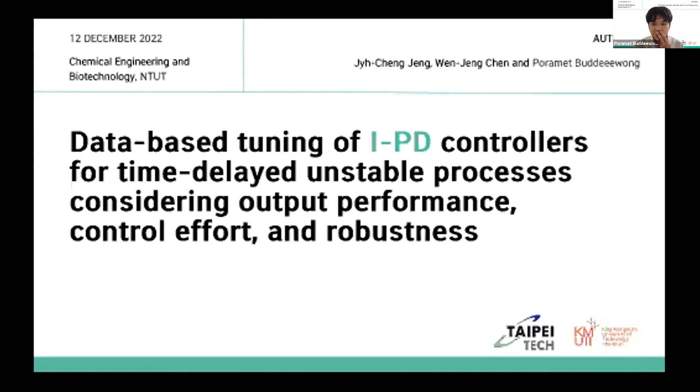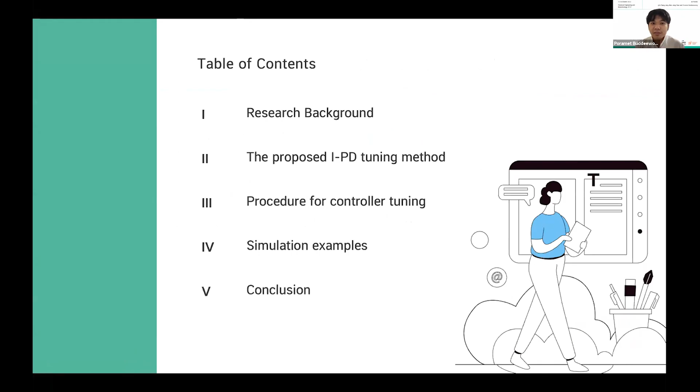My presentation is divided into 5 parts: research background, the proposed IPD tuning method, procedure for controller tuning, simulation example, and conclusion. First, I would like to give you some background information. Let's start with the PID controller. As you know, the PID controller is widely used in the chemical process industry because it has a simple structure and performs satisfactorily in many control applications.

However, the PID controller performs badly for controlling time delay unstable processes. The major weaknesses of the basic PID controller are the effects of the proportional kick and derivative kick. In order to minimize this effect, modified forms of the control structure have been proposed, such as the PIDP and PIPD controllers. But the major weakness of the PIDP and PIPD structures is they have 4 parameters to be adjusted, so it can be difficult to decide.

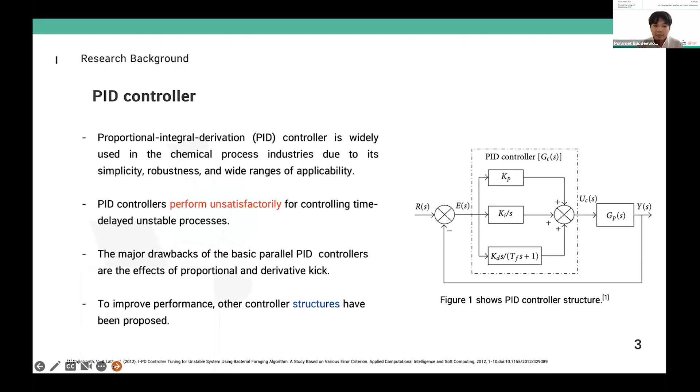From the problem that I mentioned before, the IPD controller has been proposed. The IPD controller is one of the modified versions of the PID controller. It was proposed for eliminating the proportional and derivative kick. The right-hand side of this slide shows the IPD controller structure, and the bottom of this slide shows the control output equations of the PID and IPD controllers.

As you can see from the equation, all terms of the PID controller respond to the error signal, but the IPD controller has only the I term responding to the error signal, and the PD terms work on the process output. After we know what the IPD controller is, next I will talk about the proposed IPD tuning method.

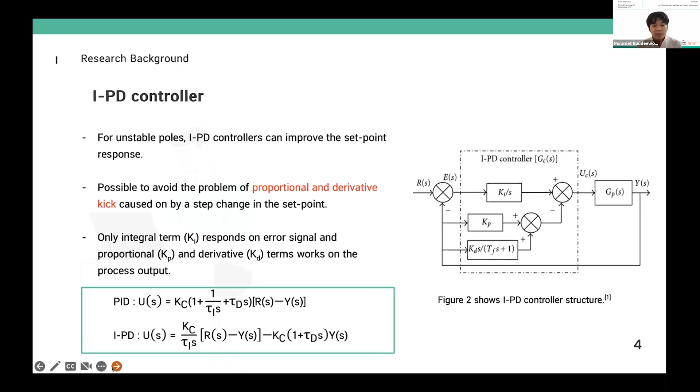In this work, the virtual reference feedback tuning framework is used to tune the controller. The main concept of virtual reference feedback tuning is finding the controller parameters that minimize the difference between the collected data and calculated data. This method requires process data collected from an experiment under closed loop operation. For the IPD controller, the virtual control output is calculated using this equation, replacing the set point R with the process output Y multiplied by the inverse reference model, and rearranging this equation.

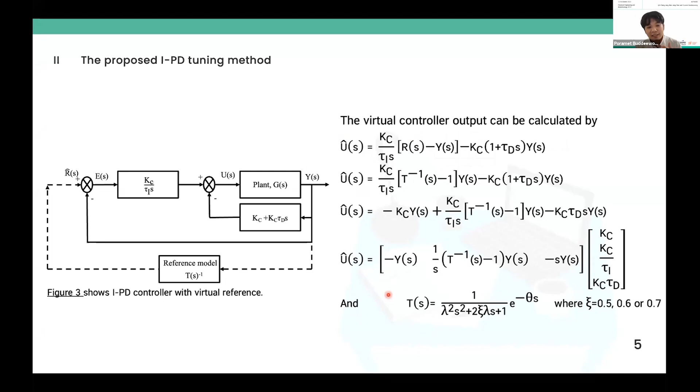For the reference model, there are two unknown parameters, theta and lambda. Theta has been defined, and lambda is found as the lambda which can achieve the target MS. After getting the reference model, we find the controller parameters that minimize the difference between the collected controller output and the virtual controller output by equation 1, and equation 1 can be solved by the least squares method as shown at the bottom of this slide.

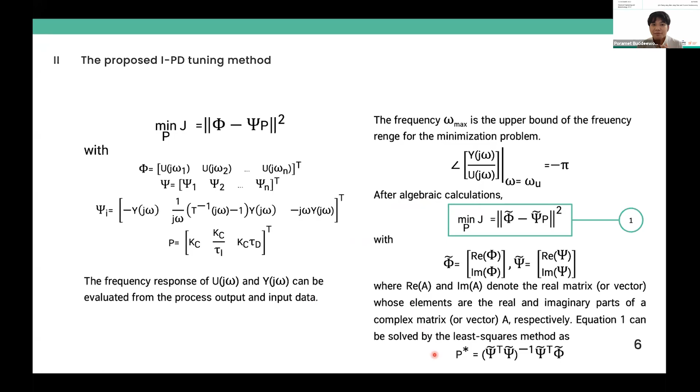After getting the set of controller parameters Kc, tau I, tau d, we find the optimal control parameters by changing theta in the reference model. The objective function of this work is a summation of output performance and control effort, using ISTE to estimate the output performance and ISCR for control effort. Moreover, our objective function has eta as the trade-off parameter between output performance and controller effort.

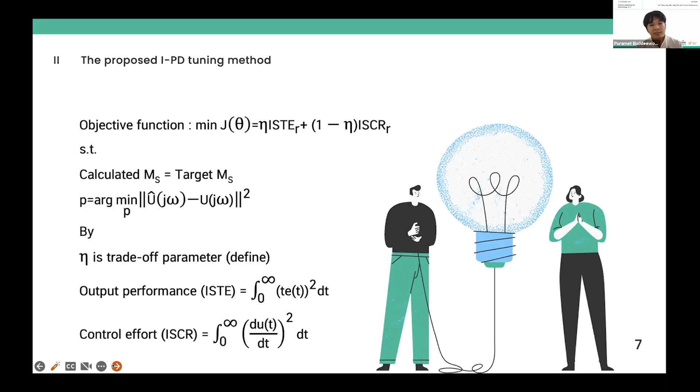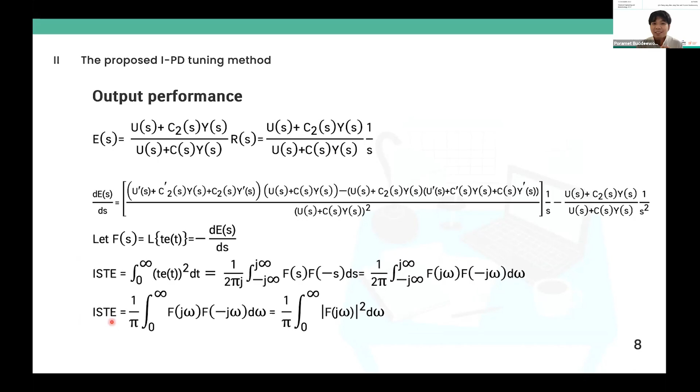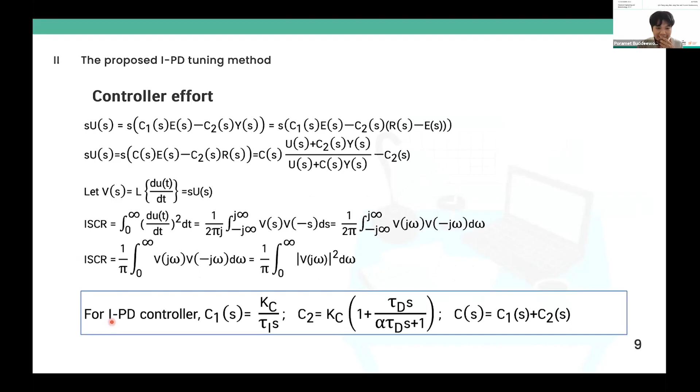I divide the procedure for IPD tuning into 4 steps. Step 1, collect the process data, input data and output data, from a closed loop set point test. Step 2, set the searching range of theta and decide the level of system robustness in terms of MS. Step 3, solve this minimization problem within the range of theta that we define in step 2. The algorithm involves 2 nested iterative loops, the inner loop and outer loop for the iteration of lambda and theta respectively.

For each chosen theta, the parameter lambda is found as the lambda which can achieve the target MS that we define in step 2. This procedure is repeated for other values of theta until we get the minimum objective function. Step 4, use the optimum theta from step 3 to obtain the proposed tuning parameters of the IPD controller. Next, I will talk about a simulation example.

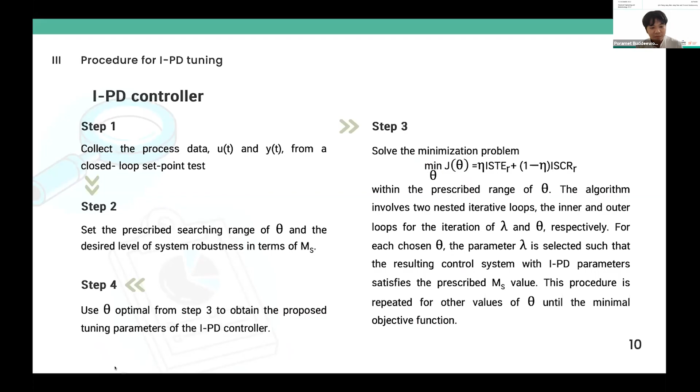For the simulation example, in this work, we compare the result with the model-based tuning design method. And because our time is limited, I will show only two examples. In the first example, consider the unstable second order plus dead time process in this slide. I tune the controller by following the tuning procedure in the previous part.

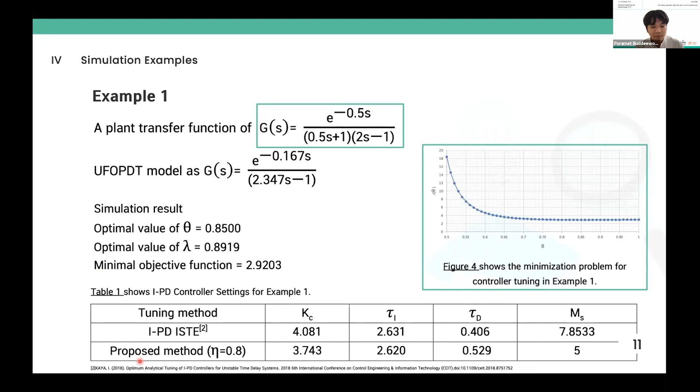One of the advantages of the proposed method is that it allows the user to manage the trade-off between the output performance and required control effort under the specific robustness level. The trade-off parameter eta is used to explain the control performance priority.

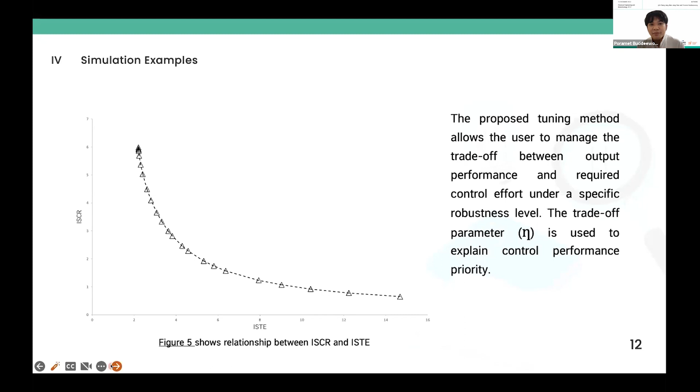Okay, this slide shows the closed loop response to a unit step input change and disturbance injected into the system at 50 seconds. As you can see from the result in table 2 and figure 6, the proposed method achieved a better performance and control effort than the model-based design method, with respect to both set point tracking and disturbance rejection.

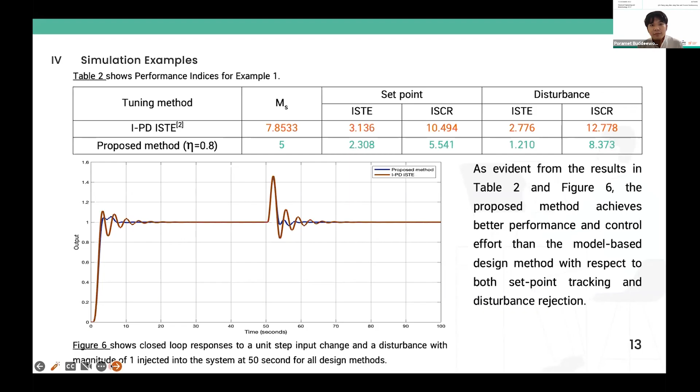In example 2, consider the third order time delay unstable process. The model-based method requires remodeling to the unstable first order plus dead time before tuning. And for the data-based method, I do the same steps and get the result shown in this slide. The bottom of this slide shows the IPD controller setting for example 2.

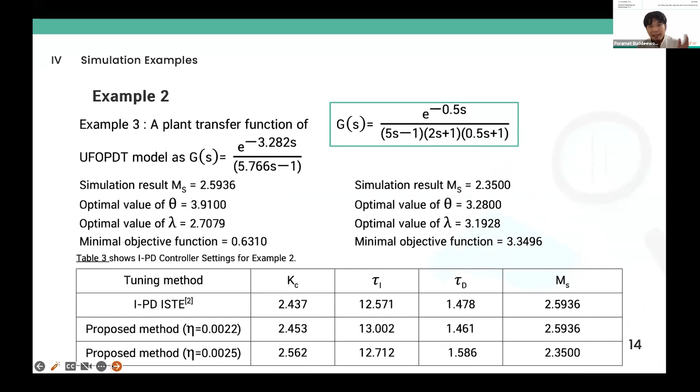And this slide shows the closed loop response to unit step input change and disturbance injected to the system at 60 seconds. The data-based method performs better than the model-based design method with respect to both set point tracking and disturbance rejection. The data-based method gives a smaller overshoot than the model-based method and can reduce the aggression in the control signal. And in this case, you can reduce the MS value to get better performance.

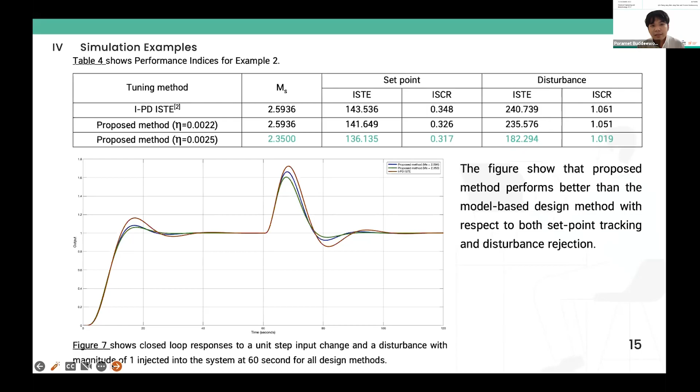For conclusion, we have developed the data-based method for IPD controller. Our method obtains the IPD setting directly using process data collected from a single experiment under closed loop operation. This method contrasts with the model-based IPD tuning method that requires an accurate process model. Then the proposed design procedure is simple and easy to implement.

Moreover, the proposed design takes robustness into the design parameter to meet the specification of the MS. And the effectiveness of the proposed method is apparent from the satisfactory control performance with respect to both set point tracking and disturbance rejection as shown in the simulation example. Then the proposed tuning method is an effective alternative to existing IPD controller design methods.

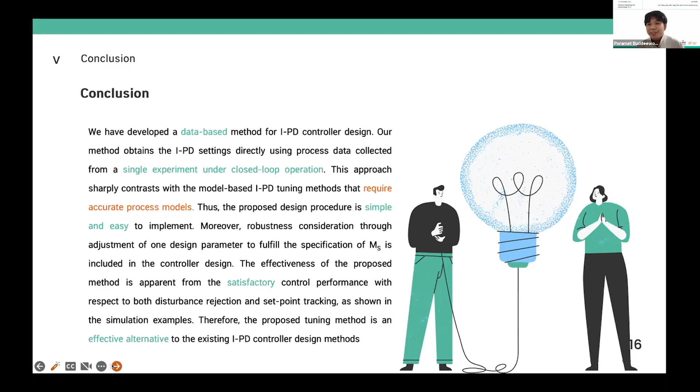Hello, yeah. So my question is, when you say you collect the data from closed loop operation, is that closed loop using suboptimal tuning? So it is not the tuned controller which we use, right? Because when you collect the data from a closed loop operation, what do you mean, under which controller is it working? So that is first. I have one follow-up question too.

So when you compare against model-based design, it can always depend upon the accuracy of the model. So you might also plot how your model predicts the data, because if I can improve the accuracy of the model, maybe that will match much closer with what I would get from the data-driven control tool, right?

In the first step, we can use the P controller, PID controller, PI controller. It depends on the... Yeah, so we get it. I suppose you are saying that there is the option of using a P controller or a PI or PID depending on the process, right? I mean, it depends on all controllers. Okay. Does that answer your question at least partly?